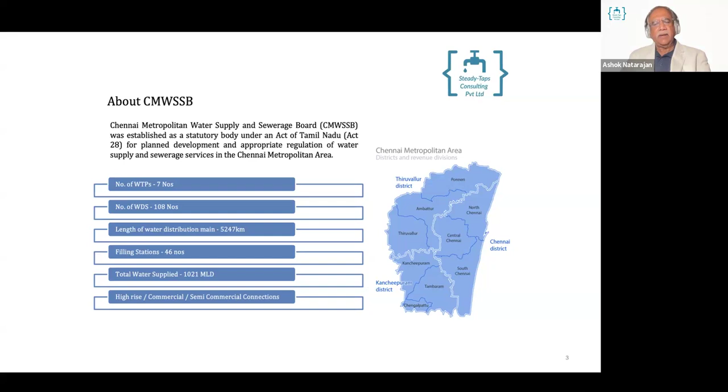This is a project which I wanted to come in. It was a unique modeling which was done. I was part of the National Task Force. They asked me to look at Chennai, and both Chennai Utility as well as World Bank engaged me for this exercise of looking at meeting some of their needs, because this city unfortunately never had proper metering, had a small amount of metering, only about 5% metering for the entire 1.25 million customers.

Household connections, 8.5 million is the population, but they have had a very bad experience over the years, especially with the mechanical meters. So really speaking, the World Bank wanted me to look at Chennai because they adopted it as a city of their partnership. They have a citywide partnership wherein they are bringing in funding from the World Bank under a scheme called performance-based scheme, based on achievement of performance objectives to get the funding. Chennai itself has a number of commercial multi-story complexes and mixed residential uses. More than 100,000 consumers are of this nature, and they wanted to first look at it.

So we did start doing a trial about 2 years back with various technologies across the world.

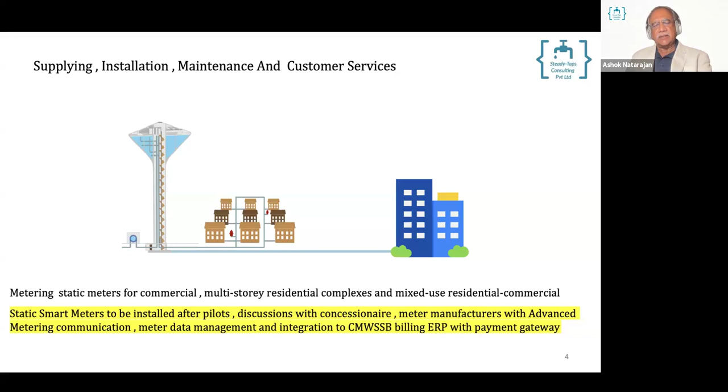We had many discussions with potential contractors and concessionaires, including big ones like Suez and Veolia. We came to the requirement that we would have a unique system combining metering as a service, the MaaS model, and the hybrid annuity model, primarily to manage the technical risk of the utility itself. The utility had capacity issues and was not up to date on technology, so they wanted a long-term O&M by the concessionaire to manage the entire asset. That is how this project came into being.

The need for the project arose from World Bank requirements. There were two major investors in the city partnership: the World Bank and AIIB, a funding company that is part of the Chinese consortium but now more prominent as a World Bank-affiliated body. They gave us a set of what I call DLIs, Disbursement Linked Indicators, meaning we had to set targets to bring reforms within the Chennai utility, showing these targets could be met within a couple of years so we could draw money from the World Bank.

The primary ones I worked on were DLI 7.3, which is 90% metering of all high-rise and commercial buildings within 3 years, and DLI 7.5, covering low-rise buildings up to the third story of a typical apartment, aimed at bringing down non-revenue water loss. We don't know the baseline yet, but it is currently being established by consultants working on the project. Based on that, there will be a required reduction over the next 3 years, and that program should sustain itself as an NRW project for funding to continue.

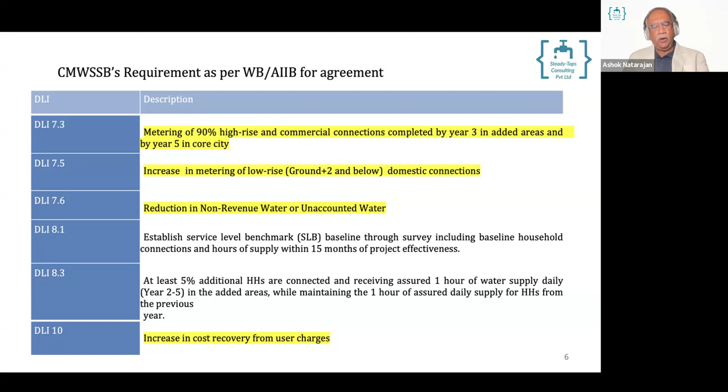Increasing cost recovery from user charges is equally important. Some money has gone toward institutional strengthening, but the main component is enhancing quality of urban services, which involves reduction of NRW and performance-based contracts. The metering portion, covering DLIs 7.3, 7.5, and 7.6, is about $35 million, and overall about $90 million has been committed.

When we started this project two years back, Chennai Metro was one of the earliest utilities in India to come out with a metering policy. This was necessary because so far everything was unmetered, and customers weren't educated enough to understand how a volumetric tariff would work. Chennai, by its bylaws and as a very old city, is the second oldest corporation in the world, where the city mayor still has a key role. So we formed a metering policy, enunciated in 2022, which has been recently updated by me.

Primarily, the policy aims to reduce non-revenue water from whatever baseline is established, and to increase cost recovery. It also addresses efficient use of water, since there's a deficit in the country, and ensures fairness and equity for all customers, setting out the roles between the utility and its consumers regarding installation of meters, billing, maintenance, and similar matters.

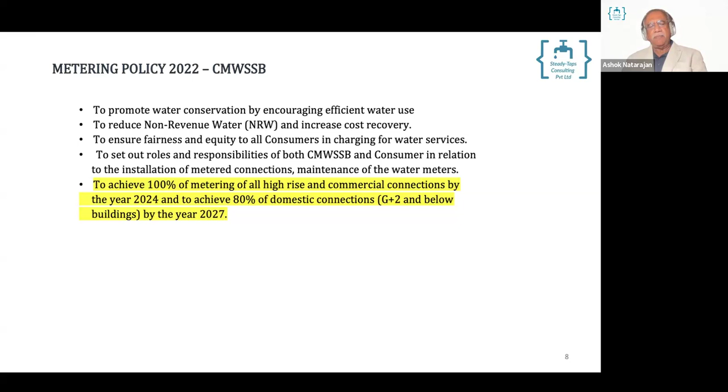So that is one of the key things, to look at these customers, especially the high-rise customers and the semi-commercial and private customers, especially the large commercial offices that came in as an objective.

I told you Chennai has got 5% metering historically. One of the best meter suppliers has been servicing this about 5-6 years back. The experience of the meter itself has been good, the product quality has been good. But unfortunately, as a system, the billing system, the ability to retrieve data on an AMR, and the ability to read meters in a very specific application in Chennai was lacking.

Especially in most of the core area, a 526 square kilometer area, the water connections are given 5 feet below the ground, because Chennai has got flat terrain. So all the water being sent is managed from 15 large distribution zones, and they are pumped on a daily basis, with the result that sometimes the last mile connectivity does not have flow. And secondly, in order to get the pressure, the pipes have to be laid underground by about 5 feet, and that is where the house service connection is given, and the chamber is also built.

Unfortunately, Chennai is subject to a lot of climate issues in the last few years. We had a tidal wave some time back, and we had a tsunami also about a decade back, which totally devastated the city. One of the things is that we get unseasonal rainfall, which actually clogs and floods the chambers. So the meters, in spite of being IP68, are not able to be read. And that is why this program, done on mechanical meters, was not a success.

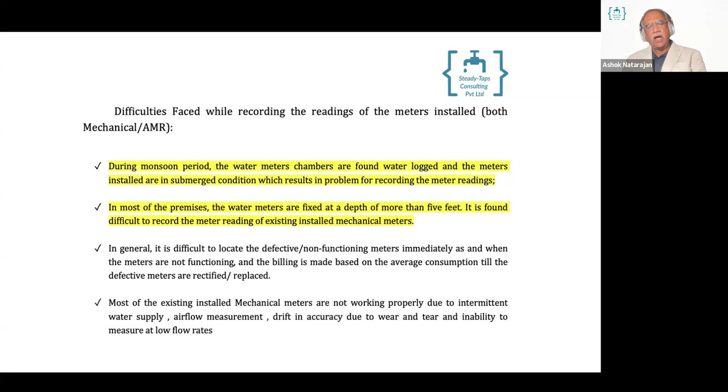It is part of the smart meter initiative about 5 years back. So we structured a contract imbibing both MAAS, meter as a service, which is very, very popular in the US.

More than 40-50 utilities in the US, I've studied them. They all use the MAAS principle of taking the product they want and getting it delivered through the entire life cycle, with everything done by the meter manufacturer and his contractor.

The other model in India is called the hybrid annuity model. This is how in India infrastructure growth is very, very high, especially our airports, our ports, a huge railway network, and a huge road network being built. All these projects have come up mostly on a basis called hybrid annuity model, where the government client and the federal government commits to a certain percentage, say 40% of the capex, and brings it as a grant, and the balance is given.

The concessionaire, or the developer, is expected to bring in the balance money, close it through private capital, his full funding requirement, and take this in various annuity models every quarter or every year, based on interest costs that are added openly and transparently, as given by the Reserve Bank of India.

So here we structured a contract imbibing both these things, and this is a very unique contract, probably even in the world—there are not many full applications. HAM is not very popular in developed countries, but in India, most of the large plants of the Ganga Basin, the huge wastewater treatment plants, are all being built on a HAM basis.

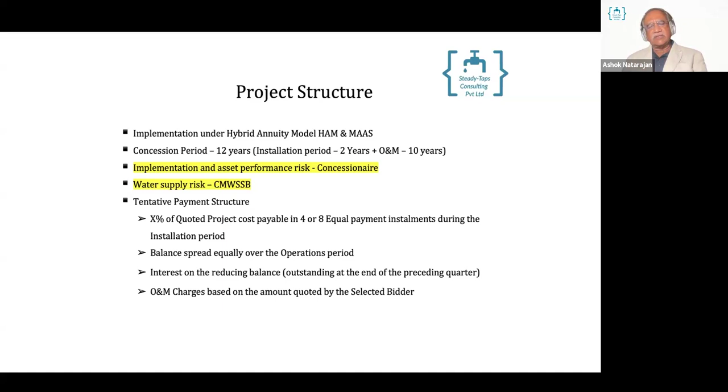And the payments are being done in about 8 installments over a period of time as per the interests that are already declared. I'll go more into it at a later stage. Why I wanted to showcase this project is that India is embarking in a big way on this new funding scheme by the Ministry of Housing and Urban Affairs called AMRUT 2.

This is actually for about 4,800 cities of India, small and big cities, all being funded by this big program of 40 billion US dollars, out of which we have already spent some 20 billion US dollars in various projects, and some of these projects are in the final stages of completion.

So what happens is that in this scheme, the government of India has opened up its guidelines in terms of application of technology. They have imbibed newer technologies. They are saying openly to bring in the best world-class technology into the urban water scenario for all these 4,800 cities. Also, they are giving output-based financing. And one very important thing is to reduce the NRW and to report the water balance on a monthly basis.

Unfortunately, the water balance in India, in spite of spending so much money, 20 billion, and going for so many schemes, is still not refined. And very often it so happens that the NRW baseline, in most of the cities in India, is unknown or it is just a guesstimate.

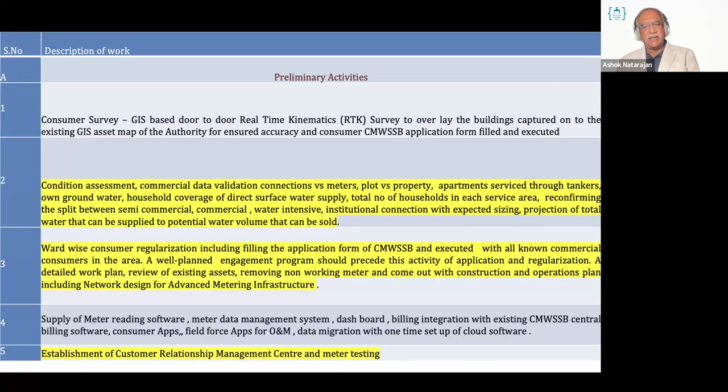And also the establishment of customer relationship management and meter testing forms an important part of it. This also got a good component out of whatever figure I told you about the World Bank committed funding, and on top of it, the Chennai Metro Water, the government, would also be investing some money into this. There is a fair amount of civil work involved in laying some of the feeder mains, especially in the added area, which constitutes a population close to about 2.5 million.

And also looking at newer areas, newer customers, new connections to be given, and also the house service connections to be implemented by means of MDPE piping. And in some of the areas, especially the core areas, we would require the chamber to be built underground because the water connection is given 5 feet below the ground.

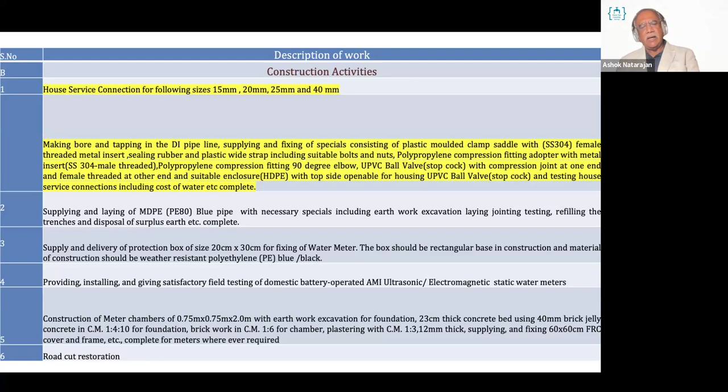So with all these things, when we analyzed the pilots and the trials that we have done over 2 years, we zeroed in on smart metering and the implementation of smart systems to cater to the city's requirement. And these are consumers which are paying customers. Today, Chennai Metro earns from these 100,000 connections roughly about 75 crores.

And within 2 years, we did the analysis. The figures were almost doubling to about 150 crores. And at a 10-year horizon, it was looking quite lucrative. And they will find an avenue to actually have their water pumped from the desalination plant into this whole area.

So if you really see this, we have structured the O&M, and this is how any other city would have to do it, is to structure the O&M into a 10-year KPI, performance linked, because the operator would have to stay till the last, ensure that the assets work properly, and that it delivers the type of KPIs that have been set, which I'll tell you. Also, it involves building the payment gateway, and the entire thing would be done on a digital platform, with periodic maintenance by the operator himself.

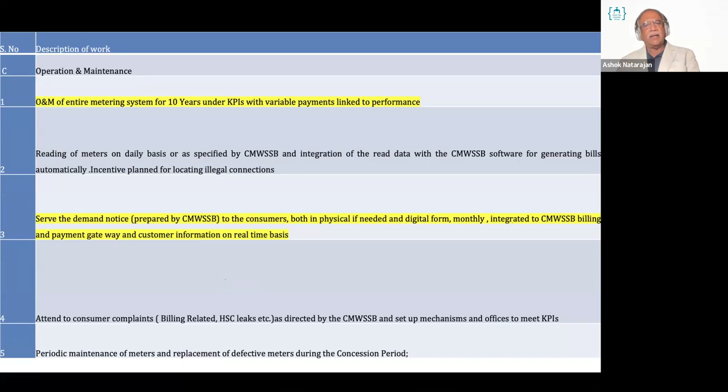So in short, the deliverables of the project are the customer data validation, the survey part of it in the first 3 months, coming out with the commercial data validation and discrepancy management methodology and output report, coming out with a network report in terms of network management, how we will communicate between the meters and the master station, how you will integrate it to the billing system, placement of meters itself, and then online customer service and online billing to the payment gateway that needs to be built in, and maintaining the whole thing under a strict KPI, which I'll come back to later, for 10 years.

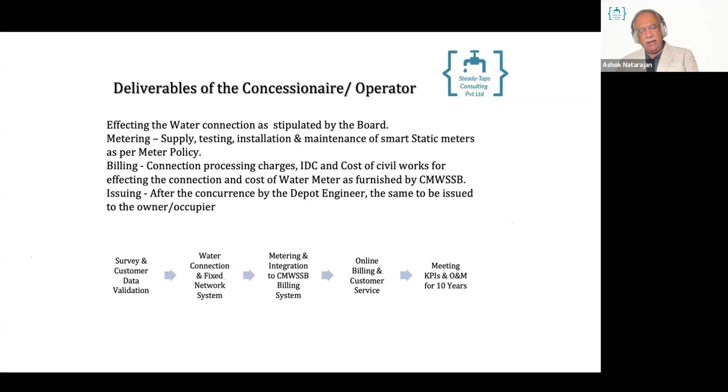So if you see the technical analysis, all of you are aware, I don't have to go into a great deal of depth, but for the people who are overseas participating in this IWA webinar, 95% of India is predominantly on an intermittent water supply system. And you know the type of shock loads it has on the meters. The meter life is very, very small in India, especially for mechanical meters. And people are not aware that the meters have to be replaced once in 3 or 5 years.

And very often there is a lot of what you call infant mortality, because there is continuous spiking of the water due to fluctuation in the intermittent supply. And more so, with the mechanical meters, we have noticed, at least from our experience across all cities, that a lot of tampering also happens.

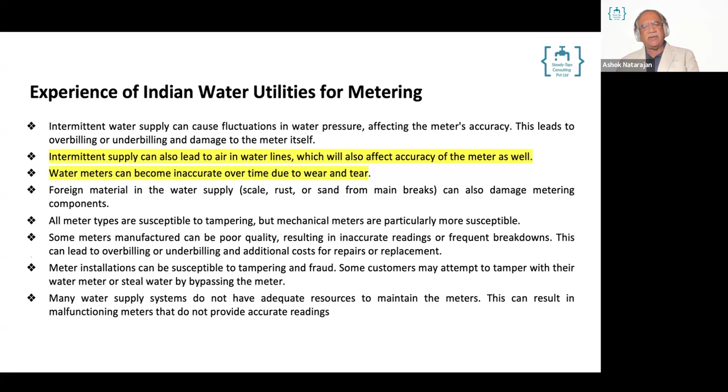So we designed this thing, and this has come out as a very good guideline. The Ministry of Housing and Urban Affairs has brought out a guideline, which is basically the engineering guideline for all the utilities and cities in India, and everybody would have to conform to the guideline. And we have actually studied all these things deeply. We took about 3 years to write this document, and we came out very clearly.

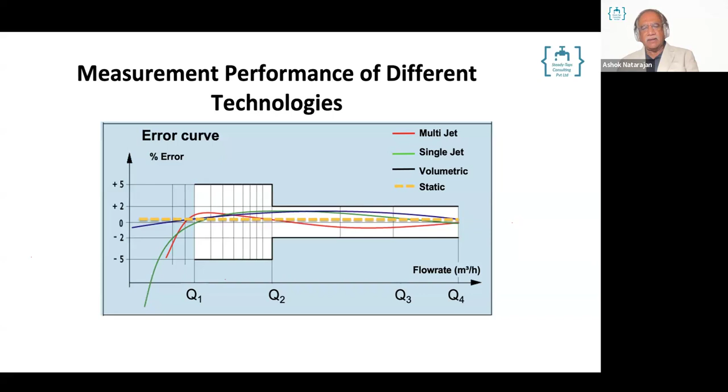All of you know the metrological characteristic of a meter. I don't have to explain, especially the Q1, Q2, Q3, and Q4. So the important thing is the ability to accurately measure low flow rates. I said Chennai is a very large area, 1,000 square kilometers, divided into just 15 zones for 1,000 square kilometers and 8.5 million population. So you can just imagine how much water the end customers will have, especially at the tail end of the pipe. Tail end consumers hardly get any pressure.

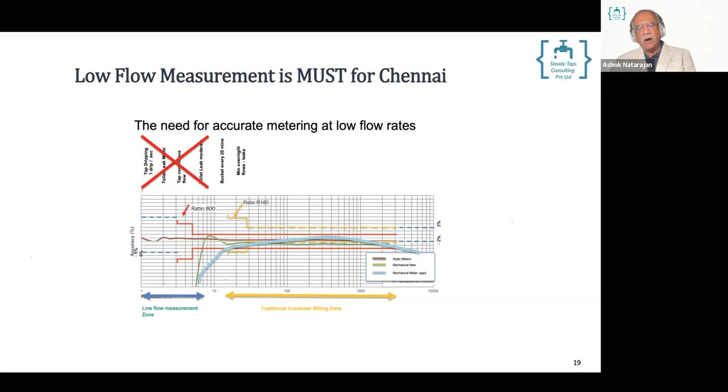These are all well defined in our standards as well as ISO 4064 in terms of Q1, the lowest flow rate, Q2, the transitional flow rate, Q3, the permanent flow rate, and Q4, the overload capacity of the meter itself. So what has happened is, in India these studies are not done scientifically. With the result, there is a huge amount of failure of meters. That is why we studied all these things before we came to a decision that we will implement smart metering. And this is the way that the Indian government has also been thinking for the future.

I wanted to tell you, I consult and mentor the national committee from the Ministry of Housing and Urban Affairs, which lends out the grant, the federal funding, to all the states. And in the next few weeks, you will be having an incentive to reduce NRW. They're giving a special grant to various states which can take targets, define their baseline of NRW quickly after a study of about 6 months, and do this project within a year to show reduction to avail of extra funding from the federal government.

Compared to the mechanical technology, one of the important things with smart meter technology is the low operating range, which I told you as a dynamic ratio. Even the best mechanical meters around the world, which are being imported, cannot work at less than 16 liters per hour. The normal general meters manufactured in India will be accurate only with R160 metrology class, which is 30 liters. That is what 90% of India's 17, 18 meter manufacturers will comply with. A few of them would be in the range of 16 liters per hour.

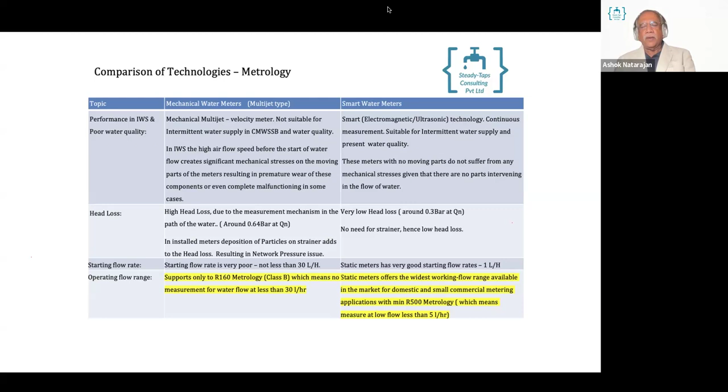But that doesn't suffice for India's large cities and networks. We don't have DMAs. We don't have the pressure systems in India. So with the result, the meters go bad even after being implemented, and that is why lots of controversies with the customers happen. Whereas these new smart meters are able to go to R500 metrology and low flow, absolutely at about 5 liters per hour.

And also the life of these meters: in all our meetings over the last 2 years we have asked the meter manufacturers for a 15-year guarantee, and we have checked these facts across India as well as the rest of the world, wherever smart meters are being implemented. And we are quite clear, at least 15 years is possible, and at least 12 years for the battery life itself, if your communication systems are well commissioned and there is not frequent querying, but at least once a month querying of the AMI or AMR system, it's very much possible.

In the new guideline, where I was one of the co-authors, we have mandated that even mechanical meters, multi-jet mechanical meters, would have to have a life of 5 years. Any failure, and they have to be minimum R160 metrology classification, and they would have to be replaced if they fail within the 5 years due to any problems of meter manufacturing. It had to be replaced freely by the contractor, concessionaire, or the meter manufacturer.

In the case of smart meters, 10 years is the minimum guarantee that we are asking, that it should be replaced within that time if anything happens. So these are some of the things that it is very important to know: the maintenance aspect of it, operating life aspects of it, and the tampering aspects of it are critical drivers for us to move towards smart meters.

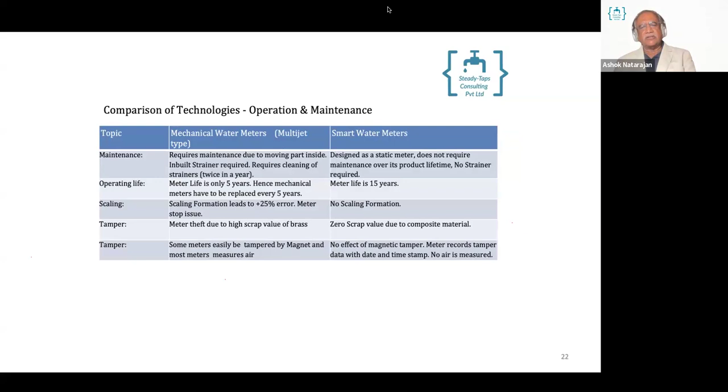This is the metrological characteristics I was explaining to you in the few slides before. This is called the dynamic ratio, which is basically Q3, the permanent flow, as defined in ISO 4064. You might ask why I'm quoting an international standard here, but Indian standards are still old.

The Indian BIS standards are still getting revised, and India is a participant in the World Weight and Measures Consortium. We actually need to have all our systems updated to the latest standards, and that is why today we are following this ISO 4064 standard in our country, with some legal metrology also being done initially in India.

That is being certified for. So this is a very important thing, because the upper end of the accuracy curve or the lower end is extremely important, whether you are having the lower measurement of plus minus 5% or upper end plus minus 2% is extremely important.

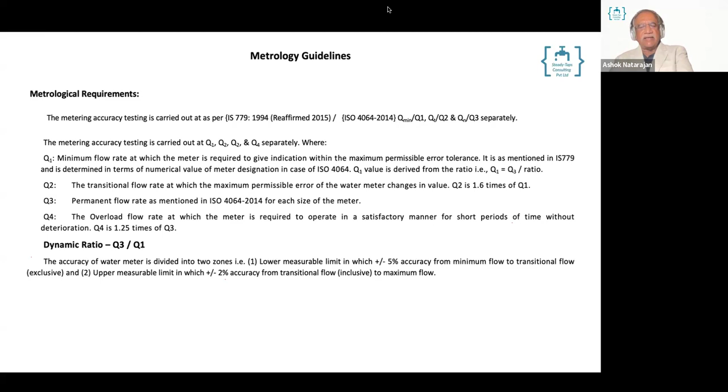Because we didn't have all these things well enunciated earlier, and now the new manual which the ministry has promoted in March of this year was actually published, and they very clearly came out with these guidelines saying that this would have to be the minimum criteria which states and utilities would have to follow in order to get the federal grant of 30%, or in some cases, as in the northeastern part of India, even 50% grant.

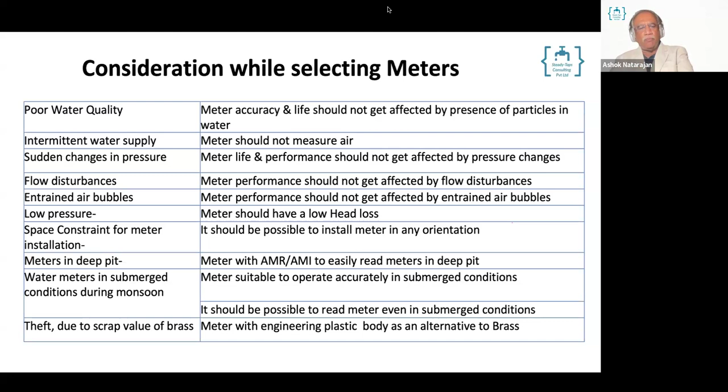So all these considerations of water quality being poor, intermittent water supply, flow disturbance, low pressure, deep pits have all gone into these factors. And then we looked at the software and the communication architecture itself.

Most of India is a well-known country for IT management, and we almost do the back office for most of the world-known companies in the world, especially in the utility space as well as in the non-utility space. And India is a leader in the telecommunication and electricity markets in the world.

So we thought that we will keep any of these communications in terms of the meter reading, for the proprietary meter reading data into the fixed network system or a non-fixed, either a radio-based or a non-radio-based, is what we will keep open. And we will revisit it within 3 or 4 months based on the cost-benefit analysis that is being carried out. And that provision has been done in terms of the costing that needs to be taken care of.

But also very important is to know what kind of operation costs are there. And because the tariffs are very low in India for domestic, especially in other cities. And Chennai can have a higher tariff for the commercial tariff, but it is not so for the domestic.

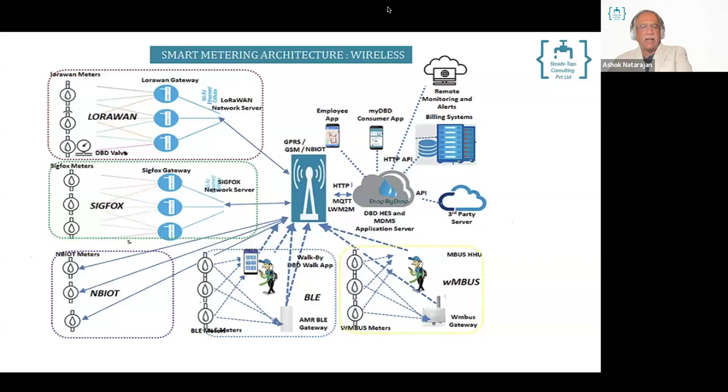It is the industries and the commercial tariff which actually subsidize the domestic tariff, which is even today based on flat rate, which is just about less than $0.5, which is very, very low, which doesn't even recoup our production cost of water.

So we have kept this open, and we have studied this worldwide, and this is how India is imbibing. Today in the AMRUT scheme, we are urging each of our 4,000 odd cities to actually imbibe new technology, and that is why I'm saying this new trigger of extra grant is coming in for people who are willing to take

forward these measures of NRW reduction and show tangible results after they actually qualify the baseline, and after it's audited, and then how much reduction they bring every year. Some incentives are being worked out now, and in the next few days it will be finalized.

And that is why India will be a very huge digital market. It will be a huge market for DMAs. It will be a huge market for sensor systems, digital twins, because this new scheme is being rolled out in the next few days.

I just happened to attend one such meeting only 2 days back, and I can tell you they are very bullish, and a concept note is being prepared right now.

So we compared the technology in terms of various network systems across. We also took a clue from the international norms that have been followed. We found many of them work on a fixed network system where there's a plus advantage: the meter manufacturer himself guarantees it. But we are also not averse to looking at other things, provided there is cost benefit and there is better efficiency and a lowering of the cost.

So we also looked at, I know India is looking at NB-IoT also, the smart SIM to be inserted inside the meter. And of course, LoRa has been there for quite some time with mixed experiences. So we are looking at a set of concentrators, repeaters, or the gateways, and the coverage is being done for the entire city. And this is how India is evolving in the rest of the cities too.

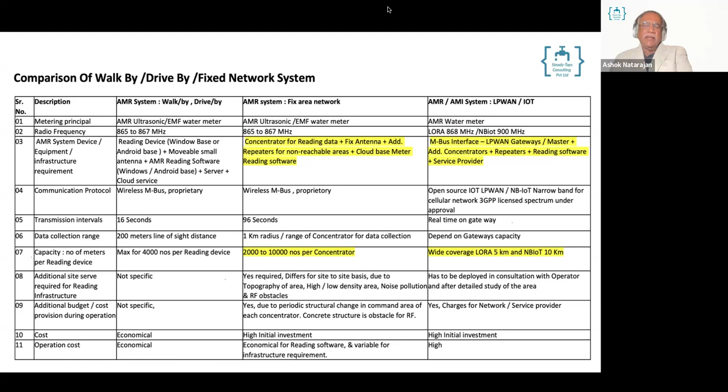So this is the classical IWA loss calculation that people like Joe and all the people in IWA are very familiar with. But in India, this is not followed so far, except for a few handful of operators, basically international operators who are doing it, and some big Indian companies like Larsen and Toubro, other people who actually do this loss calculation. These people are not educated because these are not taught in our schools, our engineering schools.

And this is one of the things that I have extended this IWA classification to an extended form in terms of knowing exactly for a city the real-time water balance that would happen, especially in terms of authorized connections. What is the actual bill?

What is the actual bill? What is unmetered and not billed? What are the government customers paying? How much of public taps are you giving non-paying? How much are you giving for firefighting purposes, and how much is going towards illegal connections?

And then the classical water loss calculation in terms of real loss and apparent loss. And what are the drivers towards this loss? Is it due to the meter problem? Is it due to the billing problem? Is it due to the pressure-related operation problem? Or is it due to the leaks problem?

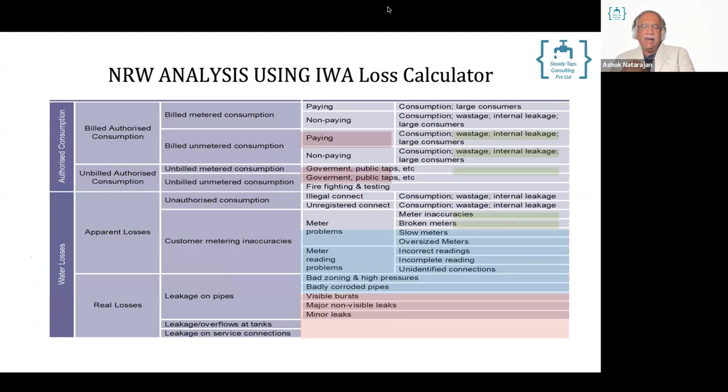This can also be quantified. And this MDI, the meter data infrastructure that is coming rolled out with the smart metering initiative, gives the real-time water balance, which is very, very important for a growth-oriented country like India. All the cities in India are growing, the infrastructure is growing, and that is why the real-time balancing, and that is why the government of India is coming out with this incentive.

World Bank has worked in these few large cities, primarily Bangalore, Delhi, Hyderabad, and Pune, all cities more than 10 million population each. And you can see if you go down in the 7th row, non-revenue water loss. This is a study done by ResearchGate, published by World Bank. Almost 51% loss of non-revenue in the states which have imbibed some amount of metering over the last few years, the last decade or so.

Except for Pune, which has gone in for smart metering the last 4 years, there is a tangible improvement. And last week, I spoke to the chief engineer of the utility who said, because of smart meter implementation, the revenues of the utilities have gone up by something like 200%. Of course, there has been resistance from a section of the public, so that requires more education itself.

So if you come to the last row, something like, we lose something like $150,000 to $200,000 per year due to revenue loss. It's something like 150 to 300 crores per year that is being lost. And this is how the IWA table in a developed country is being calculated in terms of real loss, apparent loss, and the infrastructure leakage index itself.

And unfortunately, in India, this is one area we have not concentrated on over the years. And that is the reason our revenue and expenditure do not match. Many of the cities really do not have the funds to manage the operation and maintenance professionally. So that is why we feel these initiatives of NRW reduction, introduction of smart metering and digital systems and software could bring in that required change in the country.

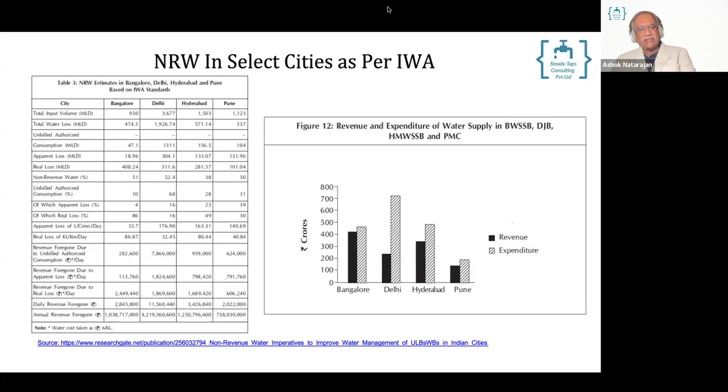And some cities like Chennai, Hyderabad are very close to breaking even in the O&M operation. Similarly, Bangalore is very close to it, and Pune will achieve it, I think, by next year or so, once they finish the entire program of reform.

So the financial analysis - this is a very deeply thought financial structure. I'm not going to talk in much detail because I'm not the authority to speak on the commercial and price part of it. But I'm sure when these various projects are constructed and structured across the country on this basis, we'll have world-class system players coming into this market.

And it's an unsaturable market. That is why for smart metering in electricity, India is the largest market after China in the world. Similarly, India would very soon be the biggest market for digital initiatives, smart metering, digital twins, DMA management, sensor management, and analytical tools in the water sector. Our new guideline from the ministry has given importance to all these things.

So in short, the revenue model is water tariff per kiloliter, and there is a tariff increase every year. Chennai has about 8 different tariffs - it's quite well defined. But unfortunately, we are billing almost most of the customers, close to 11 million, only through flat tariffs because there is no working meter at the end connections.

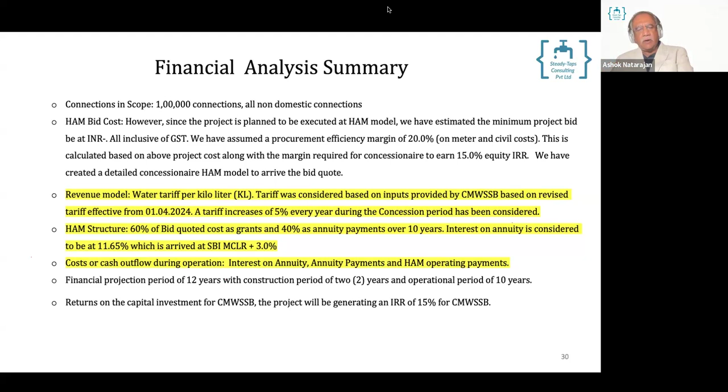And then they will recover the money over 10 years with interest paid on the money they put in, which is quite good and is normal in road projects in India. The cash outflow to the client, or the government, is primarily interest on annuity payment, but they are absolved of the technical risk, which a mass program really helps with. So both parties have a level playing field - the concessionaire, the EPC contractor and technology provider enrolled as one consortium, as well as the government - will have a net IRR of about 15%.

So the scope is primarily to look at non-domestic customers. Project costs are classified into civil cost - I've given you the indications. Some meter chambers would have to be built, lots of new connections would have to be given, and in the new areas, feeder pipes would have to be laid, which they will be paid for.

Supply, installation, and commissioning of smart meters, and communication infrastructure, which is very important. The choice of communication infrastructure would be determined by the operator who comes in, and that is how it should be. All the HAM projects in India keep the technology open because they can adopt the best, and they will have their own relationship with various technology providers for long-term guarantee and uptime of the system. Then there's the cloud-based software itself - the head-end system, meter data management, billing integration, and many customized apps.

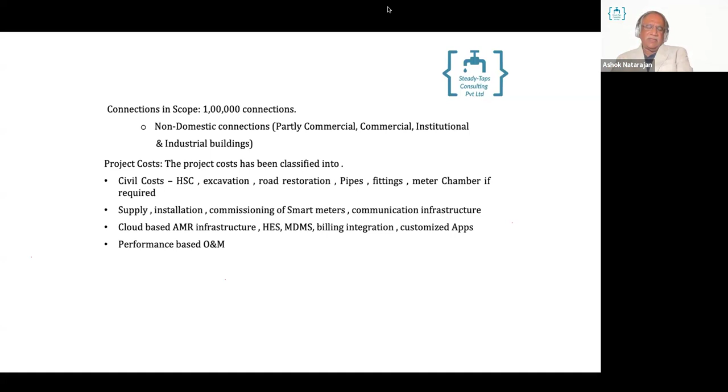Right from O&M to the customer portal, it's all being thought of. Chennai is quite advanced, and most Indian cities like Hyderabad, Bombay, and Delhi all have good ERP systems working in the background. We work with Oracle, and Delhi also works with Oracle. So this integration would have to happen with the centralized system and performance-based O&M.

So similarly, from a concessionaire or a private sector perspective, the equity they bring in is being structured with the debt and equity like this, and also they will have a repayment period for the private finance that they bring in. We hope this time private finance really comes into the market, because so far in the water sector, less private finance has really come in India, except for certain Namami Gange projects or wastewater treatment plants. Nothing really has happened in the water management part of it. We hope through a structured contract like this with a good concession, there will be private participation too, who can also lead the consortium.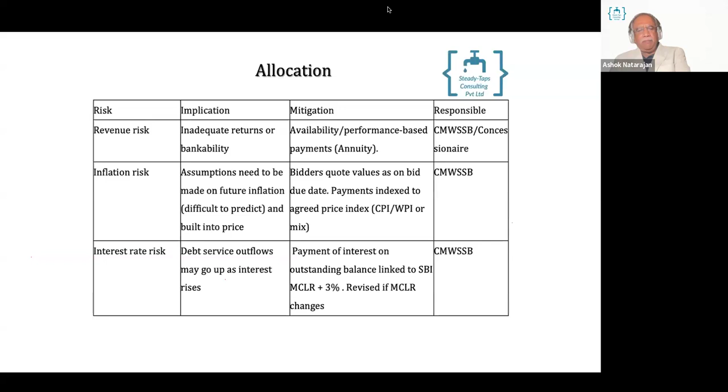So that is a big challenging thing, but we have also made it good in the pricing. We have done it in such a way that there could be good excitement for private people to come in. So the inflation risk and the interest risk is being taken by the government itself or the utility itself.

Now, Government of India has come out with various schemes. I told you about this flagship program of India, the Jal Jeevan, which is for the rural sector and is a very big success, and the urban water program, which is now Amrut 2, $40 billion, very well conceived.

And the manual - the guideline, technical engineering manual, the operation maintenance manual, and the management manual - has come out with 33 important chapters, giving a good guideline to each of the states or ULBs who want to migrate the process to a more advanced system. And there is money available: 10% of this, roughly about 8,000 odd crores or $2 billion, is available for these type of projects in the country.

It could be treated water, which India is giving a lot of importance to for recycle and reuse. But even these type of projects where there is revenue improvement through better lowering of NRW, better collection efficiency, and better billing systems can also lend support here. And as much as 30% of project cost as viability gap funding is available.

On top of it, a new scheme is going to be introduced very shortly for reduction of NRW, and I'm sure across India people are going to start jumping on it. Today the big programs of 24/7 water supply, either as a pilot or a full city, are only in a few places - only a few states have shown progress, primarily Karnataka, Bangalore and outside, a little bit in Nagpur, something in Orissa, and something in Coimbatore, one of the second largest cities in Tamil Nadu. But it's really not taken off to expectation, and this has been happening over the last 7-8 years.

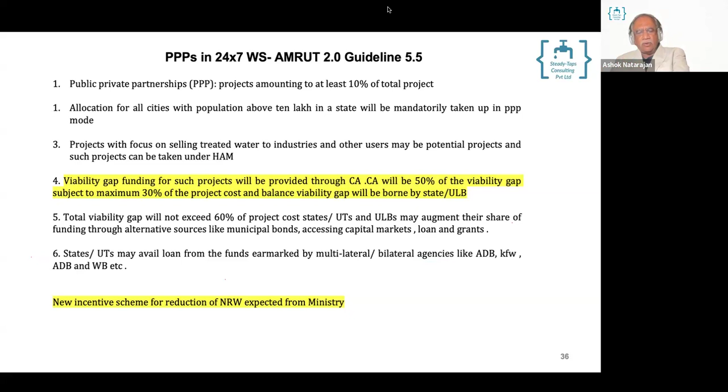So we have incorporated - when we go around India, India is a very vast country, there are so many people building infrastructure projects, but unfortunately when it comes to system approach of water balance, ability to do billing systems, ability to install meters and read them, there are very few people. We come out with a project, say, of $35-40 million, and most of the so-called concessionaires in India are not able to meet the technical requirements of the pre-qualification.

So we actually watered down this after a lot of discussion. I'm sure all the other states will also do in the same way. So we said operation maintenance, even if you show 10,000 connections - not even that, you don't have to show 100,000 or 200,000.

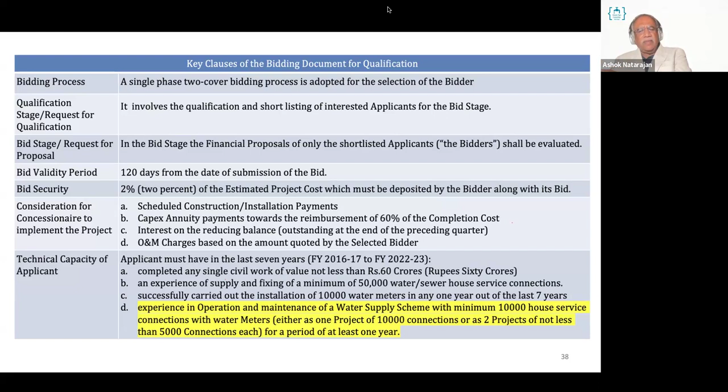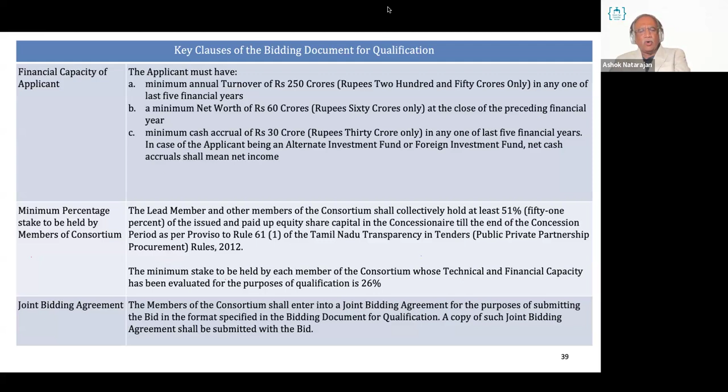Ashok, sorry to interrupt. Do you mind wrapping up in a couple of minutes, just so we've got a bit of time? Yeah, another 5 minutes. I will do that.

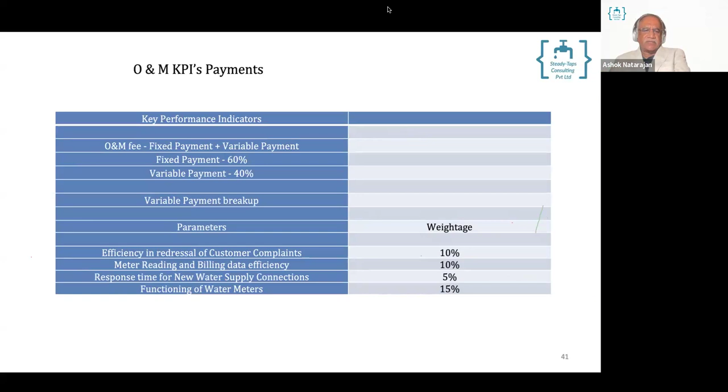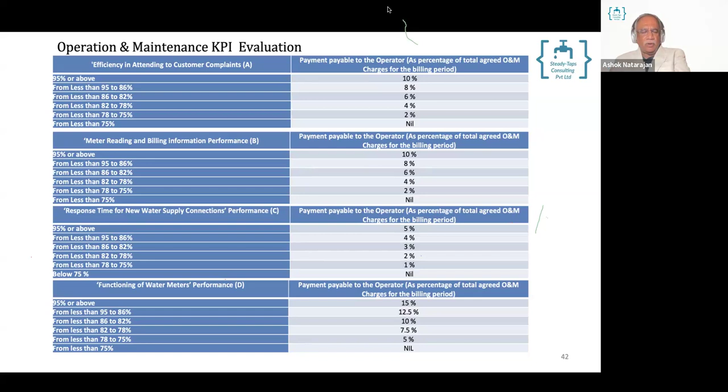We have come out with a concession contract, still at draft stage. While concessions in highways are well documented, in the water sector it is still evolving and we have added a lot of things. This is an important part of the mass metering as a service model, where we give 60% fixed and 40% variable payment, with efficiency, meter reading, response time, and functioning being very important. They don't get paid the variable amount unless they maintain 95% or above efficiency in handling customer complaints, meter reading, response times to new connections, and functioning meters. We are also making each meter manufacturer sign a memorandum of understanding with the potential concessionaire to give guarantees on a back-to-back basis.

I thank you, Joe. I hope I was on time, didn't exceed it. Yes, thanks Ashok, yeah great.